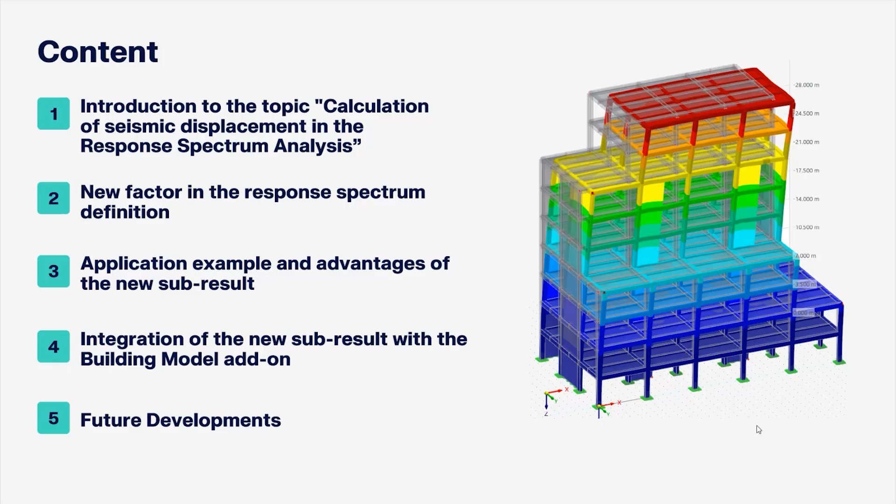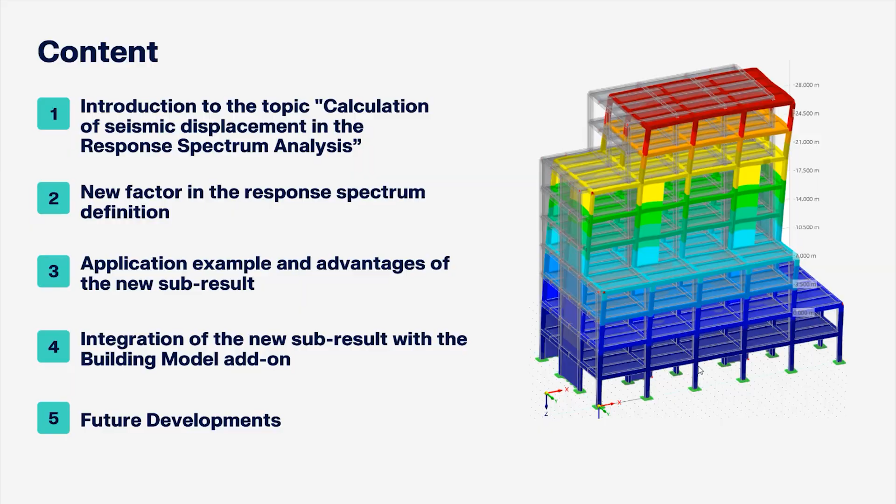The third step, with an application example, we will take a look at the new sub-result and its advantages. Then we will take a look at the integration of the new sub-result with the Building Model add-on, also connected with response spectrum. And finally, we are going to talk about the future developments for the seismic displacement and for this topic in general. So let's start with the introduction, calculation of seismic displacement in the response spectrum analysis.

We are gonna use as the reference number one and the basic reference in this whole presentation the Eurocode 8, Design of structures for earthquake resistance. And as a second reference, we have a previous webinar on this topic with the title Seismic Displacement Limits and Seismic Design of Buildings in RFEM 6. This was last year in November, presented by me also.

We are gonna use the model, so the application example, from this webinar, and also a couple of concepts that I'm gonna repeat in the next slides. But if you want a deeper view on the topic, you can take a look at this webinar. Here's the link in the presentation that you can download after today.

In this webinar we presented an overview of the following topics in general on seismic displacement. We have in the first place the elastic spectrum and the design spectrum concepts inside Eurocode. After this, we can jump into the displacement calculation. Here you see the sections from the Eurocode 8 that define these calculations.

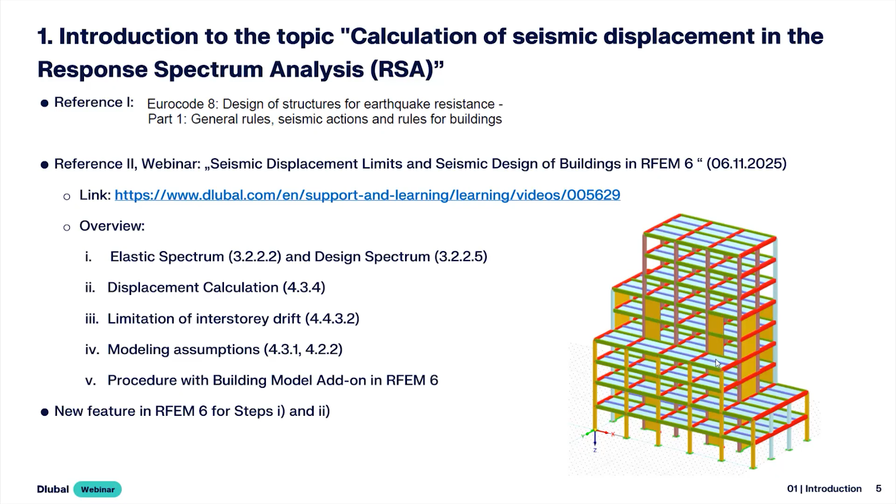Let's jump now to a short review of the elastic spectrum and design spectrum in these sections. For the Eurocode 8, we have these two concepts for the acceleration ordinate curve in the spectrum. We have two possibilities, the elastic spectrum and the design spectrum, with the big difference that the design spectrum contains the letter q, which is called the behavior factor.

It's a description of the characteristics of the structure regarding material and structural configuration, which can also be translated into how it behaves in the inelastic range. And let's take a quick review of elastic and inelastic.

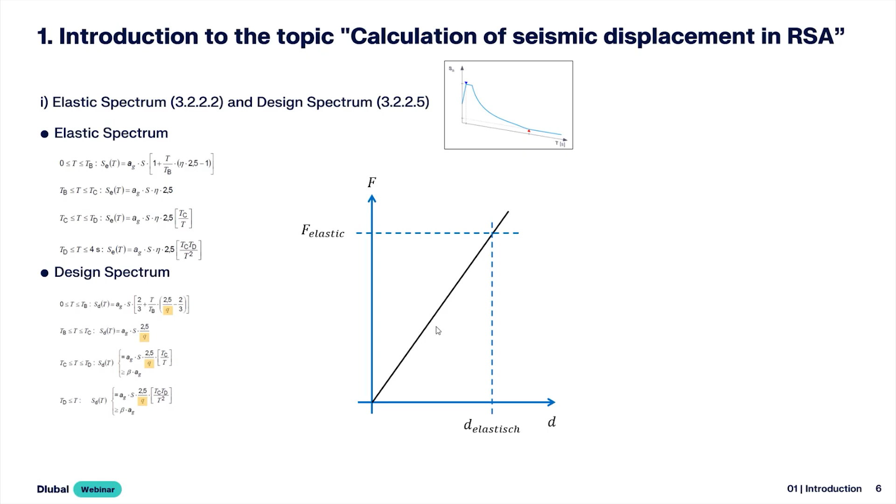The black line represents the elastic response of the structure, that's the assumption of this kind of analysis. RSA is a linear analysis, and we can perform this analysis represented with this line. Now we know that in reality the structure is going to exhibit some degree of inelasticity.

The difference between the forces can be summarized as this behavior factor mathematically, but physically it has the interpretation of a description of the structural configuration and material. So if we say that this is the difference Q between elastic and inelastic on the forces side, maybe base shear or internal forces, then there is the question: where is the inelastic displacement, at which level?

Because we made this division, but the difference in forces with respect to the linear and the nonlinear analysis does not take place in the displacement. So in the displacement, the assumption or the base of the RSA is that linear and real displacement are almost the same. So this blue area is almost the same.

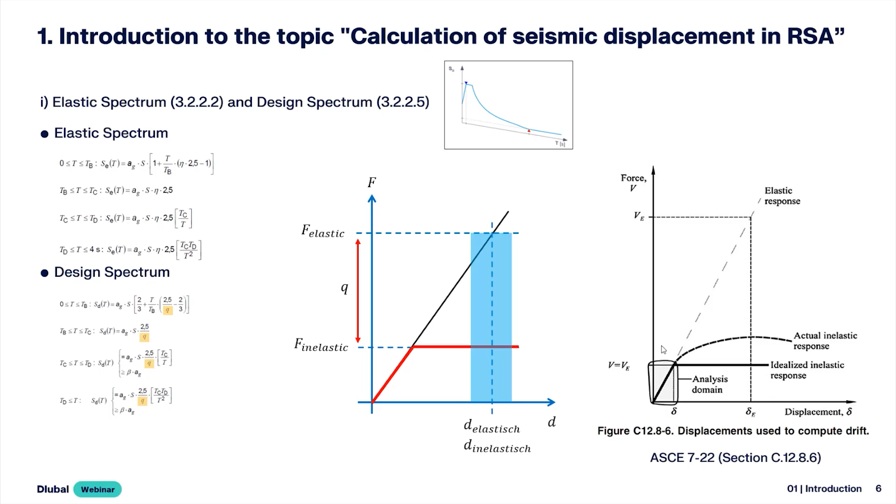Just to remark here that the actual inelastic response of the structure is something between our idealized inelastic response and the elastic response. We are somewhere in the middle, but we have some assumptions in the displacement where we calculate the real displacement and the elastic displacement. Okay, enough with this first topic.

The second topic, the displacement calculation: section 4.3.4 introduces the concept of Q sub D. QD is the displacement behavior factor. It's just a behavior factor plus the word displacement. And in general, it's assumed equal to Q unless otherwise specified.

So this means that we are going to take our displacement calculated according to the design spectrum, here section 3.2.2.5, which corresponds to the design spectrum. So this means the spectrum divided by Q. And then we multiply by QD, which in general is the same value.

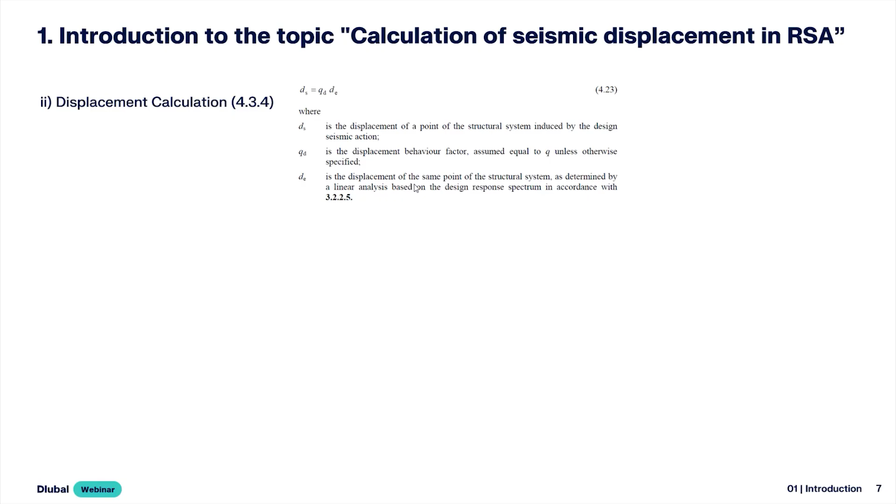So we are calculating back the displacement now. We are taking the reduced spectrum and then we are multiplying again by Q. This approach seems kind of trivial, but we are going to see an example where it is not so simple. Okay.

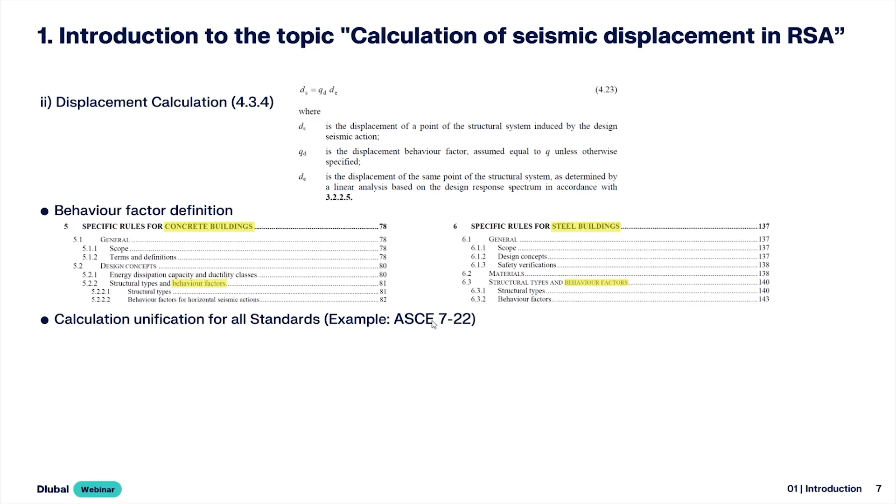And this is an example for Eurocode, just to provide you with the full context on how this development was done here in RFEM. I'm going to show a similar example for the norm from the United States, where we have a table that, as a first filter or first entry on the classification, has the structural type as a big chapter.

So chapter B in this case, in this example, of course, we have A, B, C, D, but the first filter, or better, the first classification, is the structural type, and inside the structural type we have the definitions for the material. So quite another approach, but at the end it provides the same information. But the big difference

is that in this table we have two coefficients, R and CD, which are equivalent to Q and QD. So this response modification coefficient R is the equivalent to Q, and CD from displacement is like the equivalent to Q sub D. So one can write this like Q approximately the same as R, and QD approximately CD. Just from the values on this table, we see that the definition is not as trivial as in Eurocode, where Q is equal to QD.

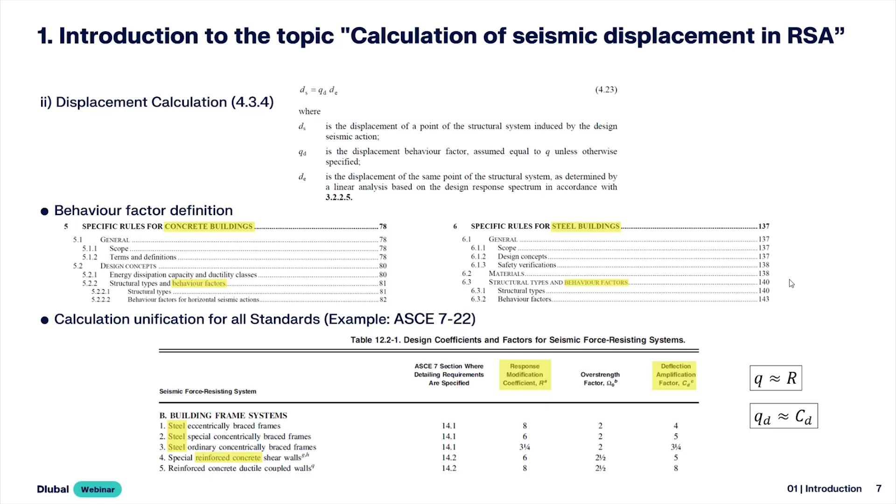Okay, so let's jump now into the second part of today, and it's the new factor in the response spectrum definition. And this new factor is calculation unification for all standard groups. I'm going to show in the program what's exactly meant by standard groups. But the idea is to unify this calculation for all standards in our program.

One can say that the section 4.3.4, so this displacement calculation, is included in every standard. So that's more than the standard. It's a basic assumption from RSA, from response spectrum analysis, and it's present in every norm. Maybe with different nomenclature, but it's a basic definition, intrinsic to the response spectrum analysis.

And the advantage of a linear calculation, as in response spectrum, is that it's possible to make a direct multiplication of the displacement, as we saw in the first graph in today's presentation. Or as in section 4.3.4, we have to multiply to have the real displacement, the seismic displacement. So this multiplication from Eurocode can be generalized as a factor multiplying the displacement, and this factor is dependent on the standard group or the standard that we are using.

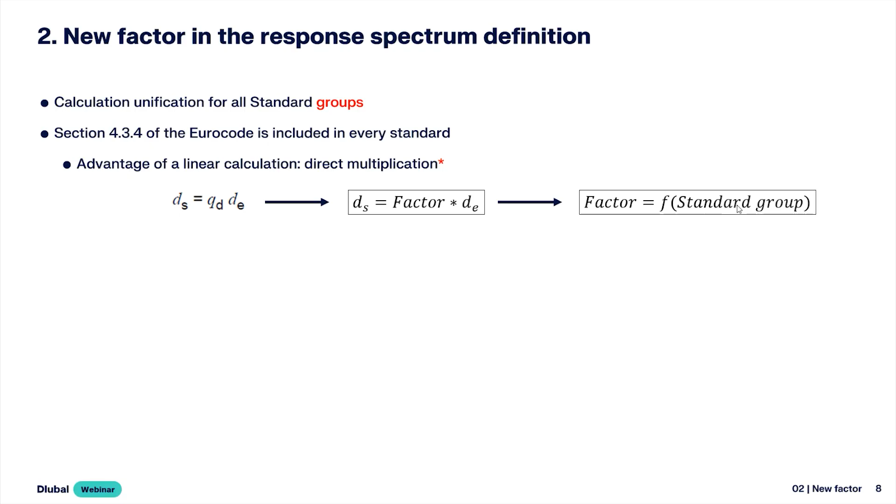Another remark regarding elastic spectrum and design spectrum: in a more general way, one can say that the elastic spectrum is the not reduced version of the spectrum, and the design spectrum is the reduced version. And this is the approach in Eurocode and in the majority of the standards. Here's an example of how it looks in RFEM. In this example, Eurocode is selected, and I can select between two categories. The elastic being the not reduced spectrum and the design spectrum, the reduced version.

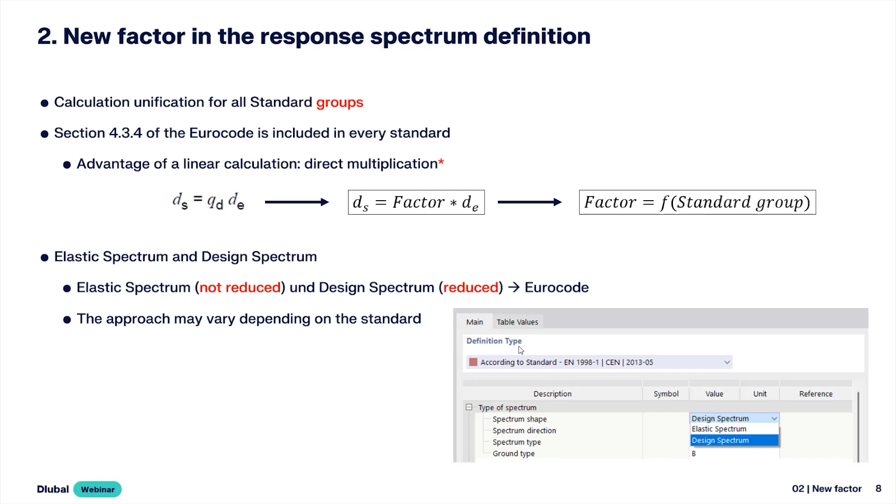The approach might vary depending on the standard, but in general, it's almost always used as described here. Of course, also because of translation in the original language or particularities in each country, the words change sometimes, but the concept remains almost the same. And our approach in RFEM 6 is that the design spectrum is, of course, the reduced spectrum, and the elastic spectrum is the not reduced.

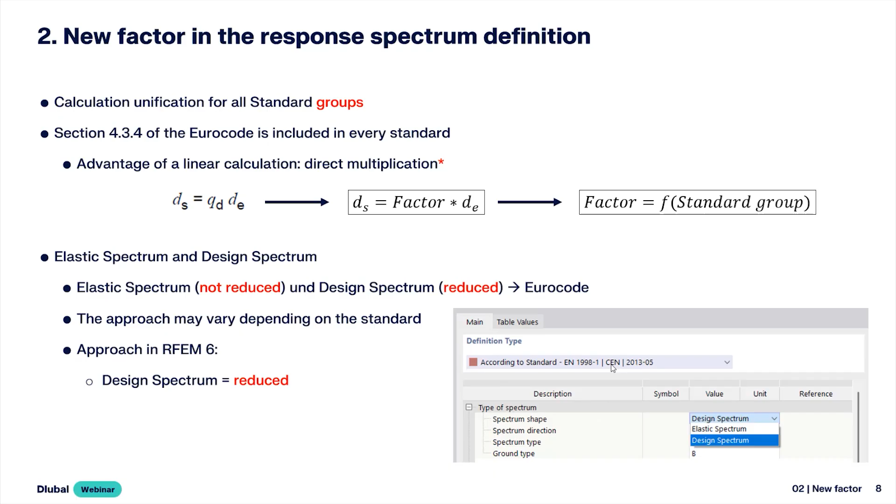Okay, so a long introduction, but quite necessary. The calculation is quite simple. It's a scaling of the results, a multiplication, but the concept behind it is the most important thing, and that's why so much time for this introduction. But now we see an application example of what we have now in RFEM 6.

As I said at the beginning, we are going to use a model from reference 2. You can take a look at this webinar, but for today it's not necessary. We provide you with all the information. We already did the introduction. So let's take a look at this model in RFEM, and then we come back to the conclusion here in the presentation. Okay.

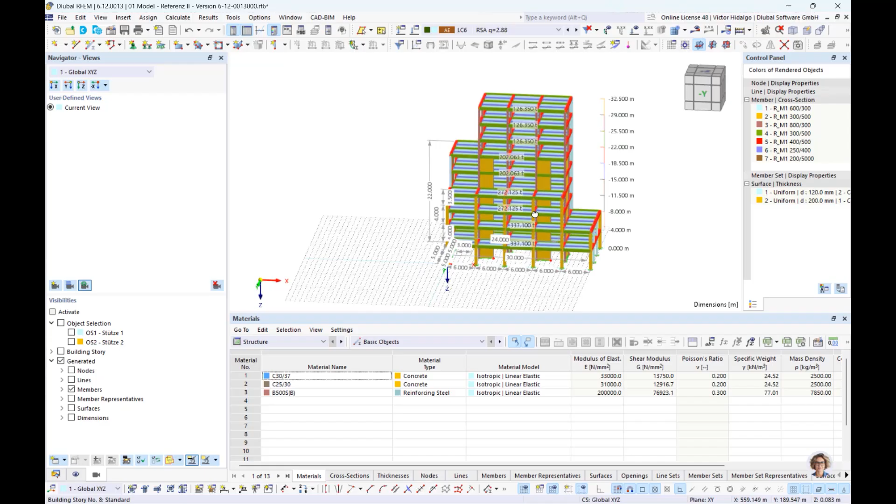So this is our building. It has several floors, and these jumps in height were done to achieve some particular participation factors in the modal analysis, but it's not relevant for today.

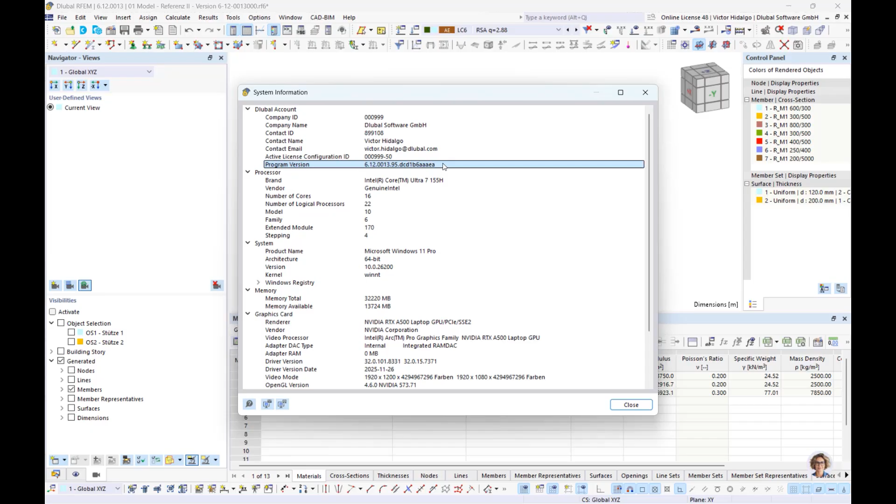Important about this model is that I am presenting here results in the version 6.12.13. I'm gonna show the system information in this, just so that you see what I'm talking about. So this program version is one of the last versions without the automatic calculation of the seismic displacement. So I want to show you how it looked before the new development regarding seismic displacement.

So for this example, in the reference to the other webinar, we had to use two response spectra. One as the reduced spectrum and the other one as the not reduced spectrum. Okay, if I go to the definition of the response spectrum, we are gonna focus on the category factors. So we have the behavior factor, as we saw for the Eurocode basic definition.

And once again, in the webinar in reference 2, I show how to calculate this value if you maybe want to take a look at a first example for it, but maybe you are experienced on the topic. So as an engineer, we make the definition of Q. We provide Q, and I'm gonna change the value just here as a reference. If it's 2, the ordinates are gonna be bigger. If it's 2.88, the previous value, that's gonna be the definition.

And here, what we mentioned about elastic and design. So if I change to elastic in the category factors, I do not have this behavior factor anymore. So this elastic spectrum is equivalent to the design spectrum, but with a Q of 1. Okay. So we have this 2.88. I'm gonna leave the definition as before, and just keep in mind that in factors we only have these two for Eurocode. Okay.

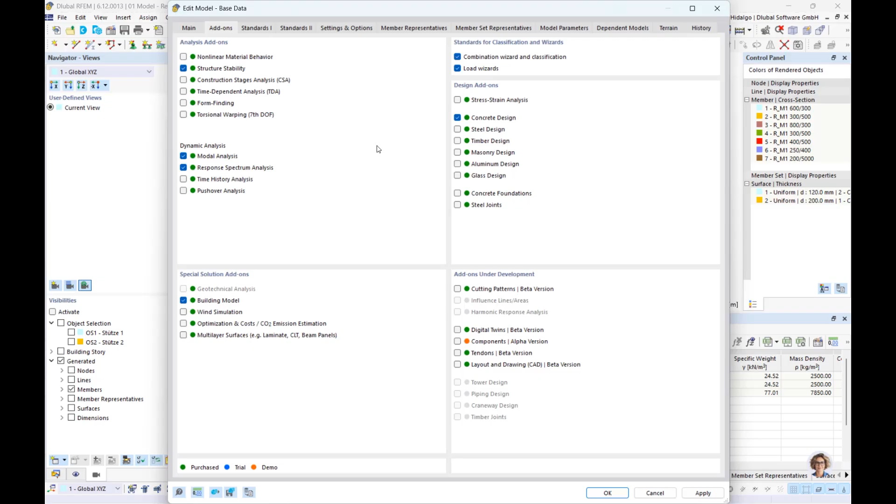And this other definition of the response spectrum, for Q 1.0. Okay, so here one additional thing: in the base data, in the Standards I tab, according to the activation of the add-ons, I have to select a design standard group, and the definition of the standard group is the first group here. In this case, for dynamic analysis, we can select one among all these possibilities, where each norm has its particular definition of the spectrum.

So I'm gonna change, just as an example, to the example that we are using in the presentation as a comparison, ASCE 7. I'm gonna change this norm. Now the definition here is according to standard, so I selected standard, and now I have another set of options where we have a different approach according to the norm. And so we see here other categories, other values. So quite different according to each norm, and that's why the different standards and their approaches were so important in this development.

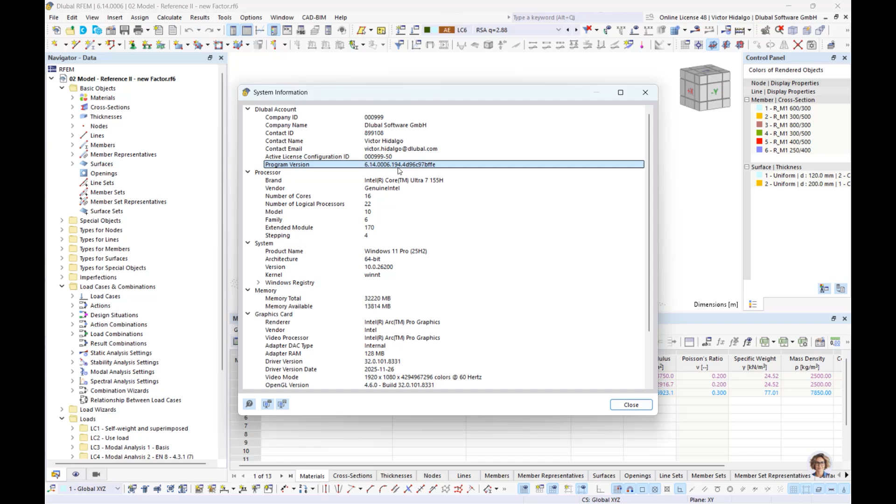Okay, we took a look at a version without this development, and now we are gonna jump to a newer version where we are gonna take a look at how it looks now. So I'm gonna go to the base data and show that for this example we keep the Eurocode, and the help system information. This is one of the first versions with this new calculation, the 6.14.6. So another version, and if we take a look at the response spectrum definition, we see the new factor that we already discussed in the presentation.

So I'm gonna go inside the definition, and here let's take a look at the factors. We have a new entry, the displacement behavior factor, where we have a drop-down list, and I select how I want to define this. So the first option is that the displacement behavior factor is equal to the behavior factor, which is provided in the norm.

However, this section also mentions that each country can redefine it according to the national annex. And that's why we introduced this user-defined option. When I use the user-defined option, I'm able to provide a different value.

Okay. So it might be the case where we have to consider this in a different way. And this 2.88. Okay. So I'm gonna go here with the behavior factor Q, so the automatic definition, and that would be like the difference regarding the Eurocode.

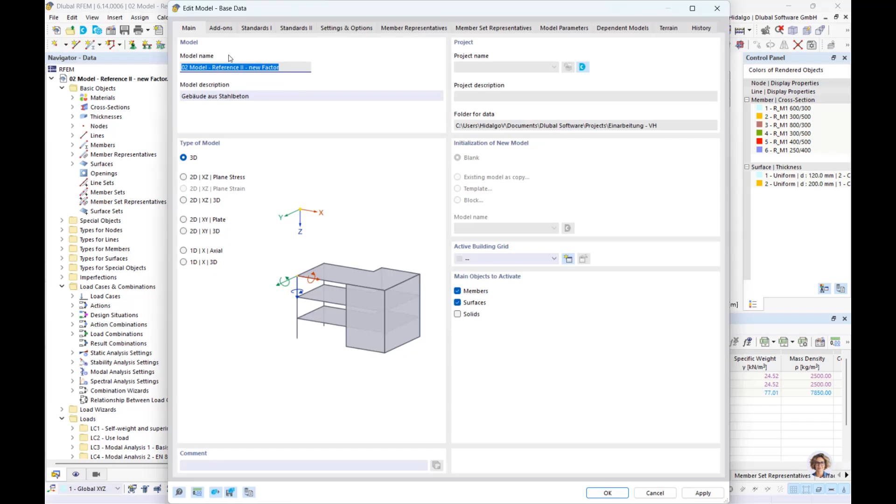So as we introduce other examples like the United States norm, let's show here what the new version of this standard is. Okay, so in this case I'm gonna go directly into the definition again. And here, this is the equivalent to the design spectrum, kind of. It's not exactly, because you have here the spectrum type as a second category. But when I select this one, the other one is gone. So this is a particularity.

This is the definition of the norm. Maybe not that important for today, just to take a look at the factors. And when I go to the category factors, now I see that I have the two factors, R and CD. According to this norm, the definition is not open anymore. So we don't provide for ASCE7 the option of a user-defined value, because the definition is universal, it's constant.

So the importance factor appears with the CD value. In this case, it's already defined, and there's the section that defines it in the corresponding standard. So that's how it would be for this norm. I'm gonna show you just one more example, just to see how diverse or how different this can be.

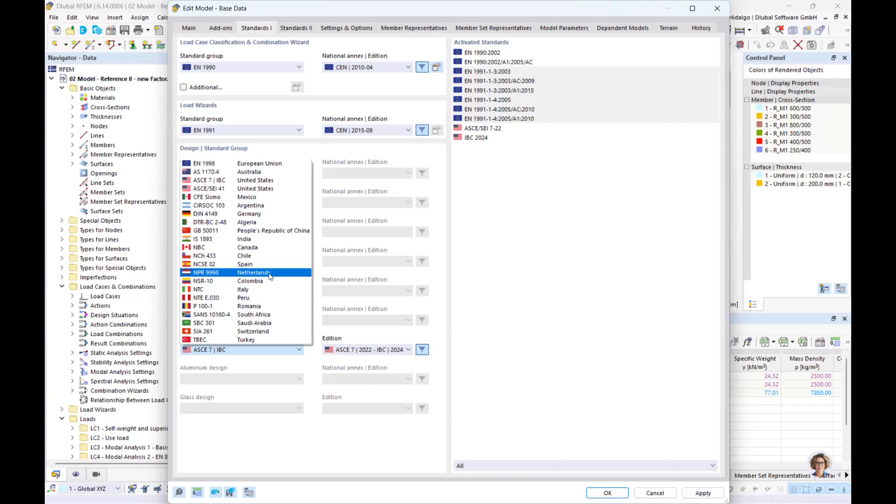So let's take now Canada, the 2020 version, can be also the other one. Now we take a look here at the modification factors. Here we have, in this case, the same definition as in Eurocode, just by coincidence. But here in the factors, we have now something in between. We have RD and R0, R sub-zero, which are not exactly correlated 100% to the R factor from ASCE7. So it's quite a different concept, used as an example, as a reference.

And here we have a mixed approach where there is indeed the option user-defined, because the norm specifies also that according to the criterion of the engineer, this could be adjusted, or there are some other factors that could be manually adjusted. So when I use user-defined, the factor is gonna be editable. If I come back to according to 4.1.8.13, here I have the basic definition of it. If I change the value, this is gonna be automatically updated.

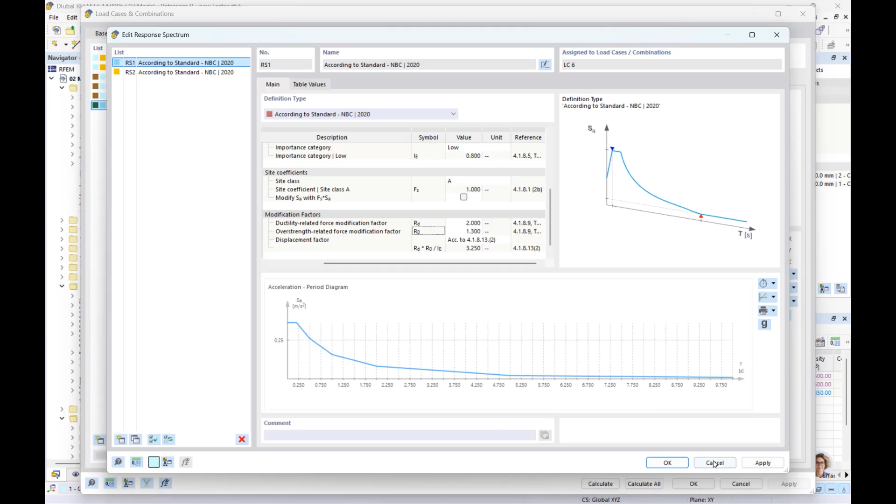Okay, so with three examples, we see that by itself it remains a simple multiplication, where we have the concept of displacement factor or displacement behavior factor, but the definition before is really dependent on the norm. It can be as diverse as one or two or three parameters. So there is not a general rule, and each standard makes its own definition. So you have to take a look at the norm if you are switching between norms.

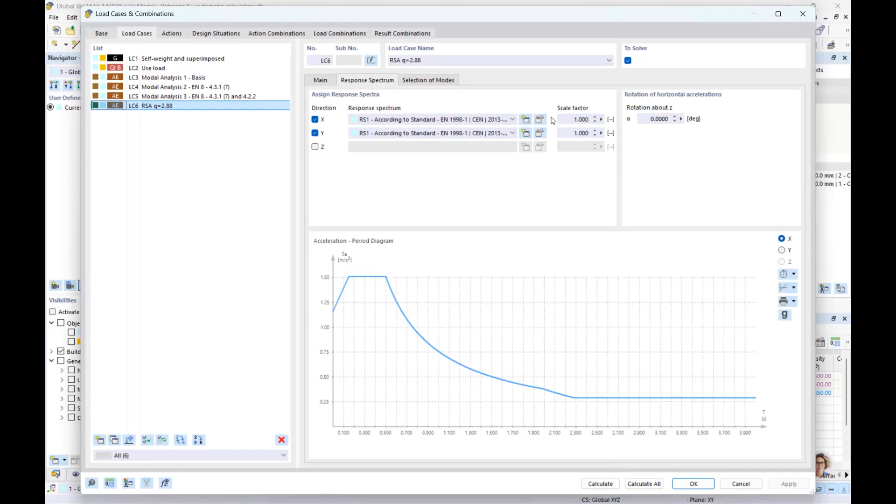Okay. So the next step would be to run this model. I already did to save some time. So this is the same model, just with results for this response spectrum analysis. I already have the results for this only load case; from all the load cases, I made a run just for it. Just for the sake of completion, I'm gonna show here the definition, all what we saw here. Exactly. Now the results for this part. So maybe we take a look at global deformations, etc.

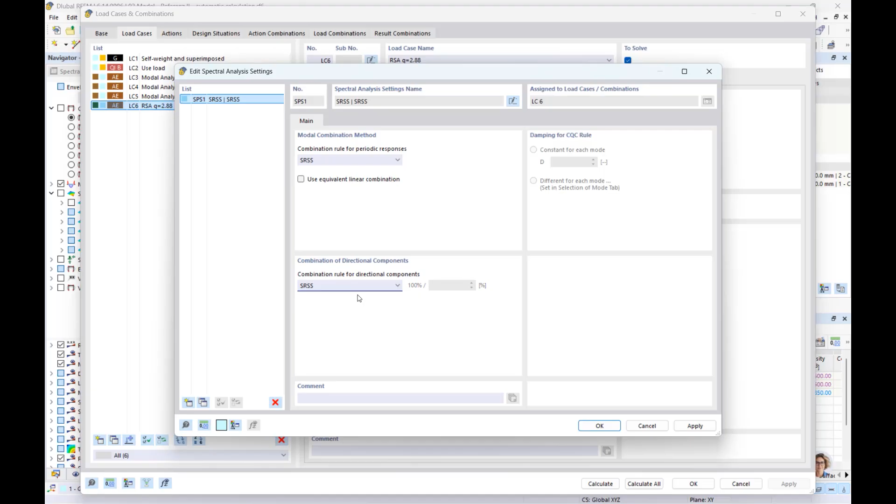Where do I find this new set of sub-results? When we show results for a response spectrum analysis, here on the navigator, we have a selection according to the desired sub-result. These rules come from the selected directional combination rule. I'm gonna show it just to have a full review on this topic. So this is the combination of directional component rule that was selected. If I use scaled sum, the name here is gonna change. I'm gonna leave the SRSS; I don't want to run the results again.

And also we see the results per direction: X, Y direction, and the selected SRSS. And as you already noticed, there is a new entry, which is the combination of components of direction with the name displacement. This is where our new factor is gonna be taken into account, and we are gonna multiply for the displacement result the base values with respect to the reduced version. So that's why the whole introduction to the topic. And now we see these results here in the program.

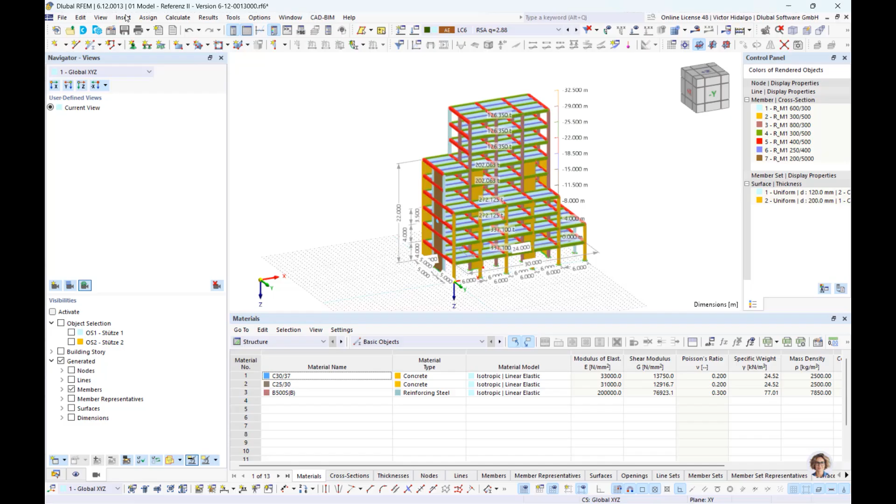Just as a comparison, I'm gonna go back to the previous version, 6.12, and show that in the results for this load case, for the RSA, there is no displacement entry, so we see the difference here. Let's take it once again, okay.

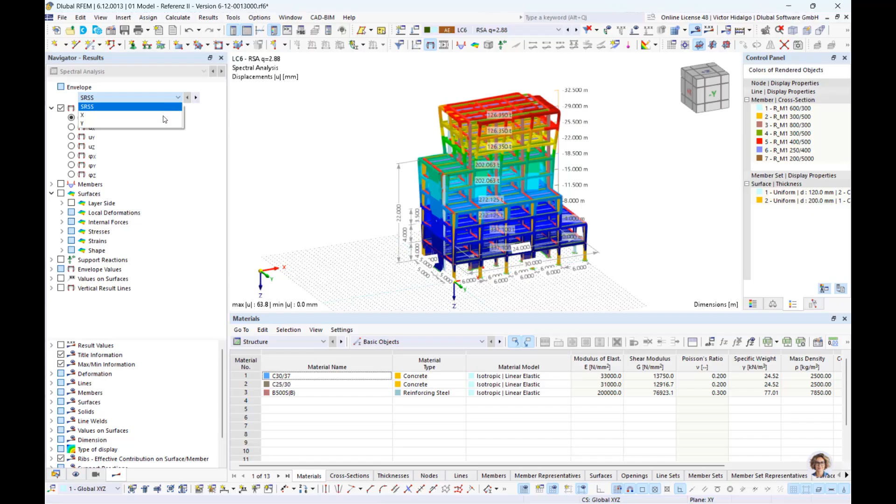If I minimize this, now I do see a displacement result. And that's the difference, or that's the new development. So let's go back to the presentation. And with this model, we are gonna make here a summary of what we achieve with this new sub-result. Sub-result refers to the selection in the response spectrum.

Okay, so the base size of the file is 3.6 megabytes. We did a version without the automatic calculation, so we need 2 RSA. That means that in the results we are gonna have more data. And in the version with the automatic calculation, we have instead just one response spectrum analysis, but with one additional entry. So overall, of course, we are gonna have a smaller file size, but not exactly the half. Okay.

So for the first, with 2 RSA, we have a file size of 180 megabytes, and then we come down to 140. When we talk about megabytes, it's not that relevant for nowadays capabilities of computers, but of course, if we add to this the design of the material and a real example, we can really save space, and also the switching between results in the interface.

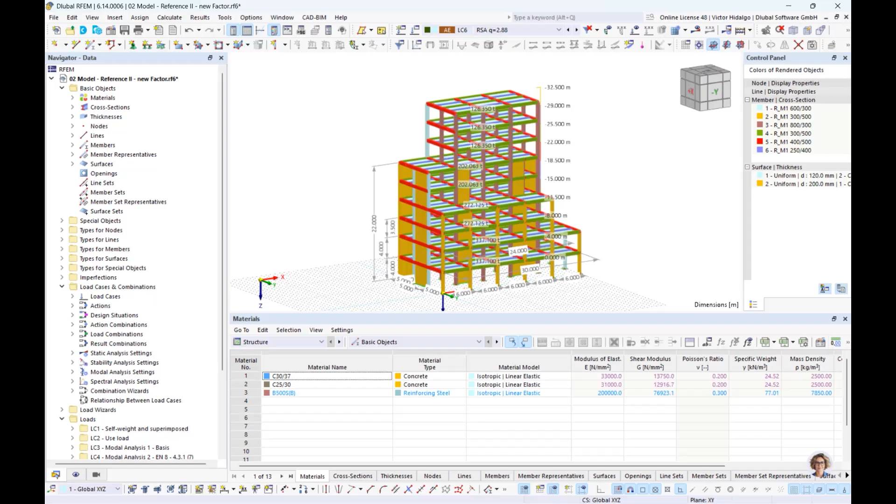So what you can do here, for example, by showing the results, let me show exactly here the selection or jumping between load cases. This is gonna be always faster if the size of the file is smaller. Okay, if the file is smaller, my computer is gonna work just better.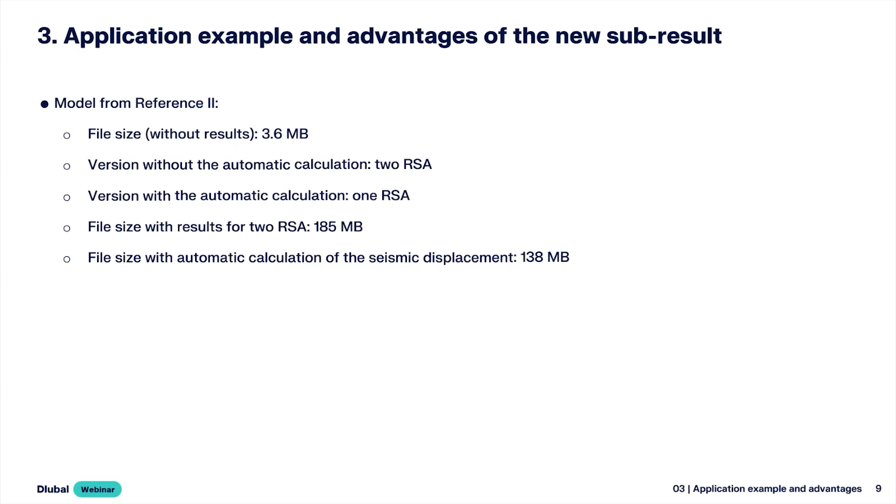So advantages of this new sub-result. The displacement sub-result gives, as we saw, smaller files, a faster interface in the program. Also a unique load case definition, so that's also quite important. And it's automatic, it's not activable, so we made the decision to not make it optional because it's a requirement that takes place in every standard. So it's quite important that we as a software provide our customers with the best guidance possible.

So that means that we report this result, and we expect that you as a user wonder, ask, what's this result, look into it and decide if it's important or relevant for your analysis and design. Okay.

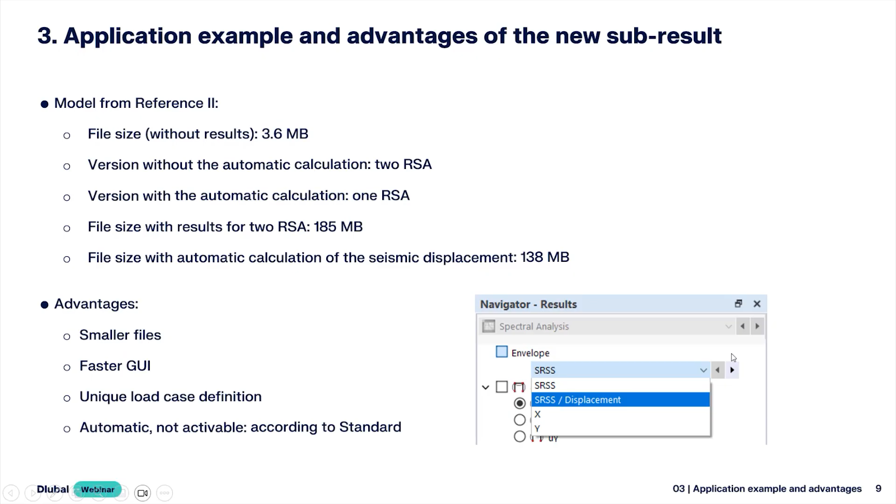Okay, with that, we are done with the biggest part of the result, and now we jump into the last part of today's webinar, which is the integration of the new sub-result with the building model add-on. So the building model add-on and the spectral analysis, or the RSA, when both of them are activated in the program, deliver a particular set of results, which are the results by stories. I'm gonna show this in the program, but let's take a look here at the concept.

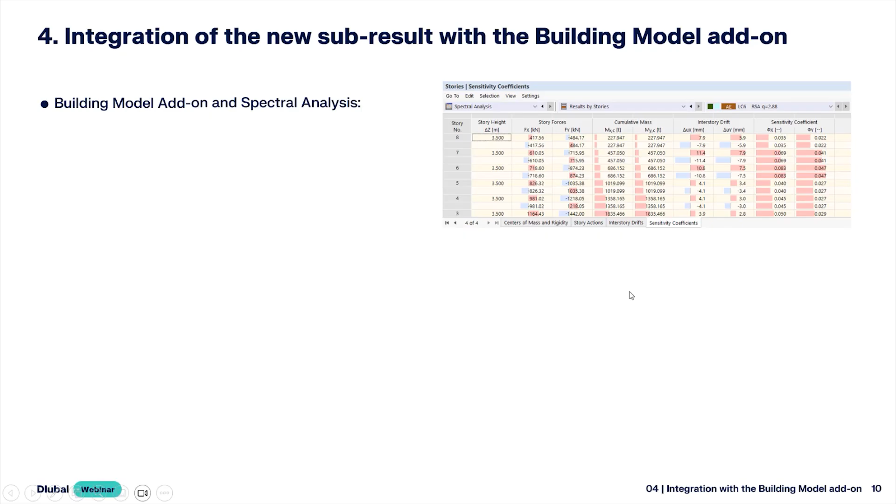So we have this table, and this entry, results by stories, has four other tables, or tabs. These tabs regarding the seismic displacement, the interstory drifts and sensitivity coefficients are gonna be affected by the selected sub-result. So at the end, we show this table for a particular sub-result, and we are gonna take a look at this in the program. But let's review what these two tables do.

So the interstory drift. Here's the section for the Eurocode. This is a unique definition, and as we saw, it's just the reduced displacement times the factor. There's not that much to decide. This is a unique definition for all standards. But there is a particularity in the sensitivity coefficients table. According to the standard, we might have to switch between sub-results in the spectral analysis.

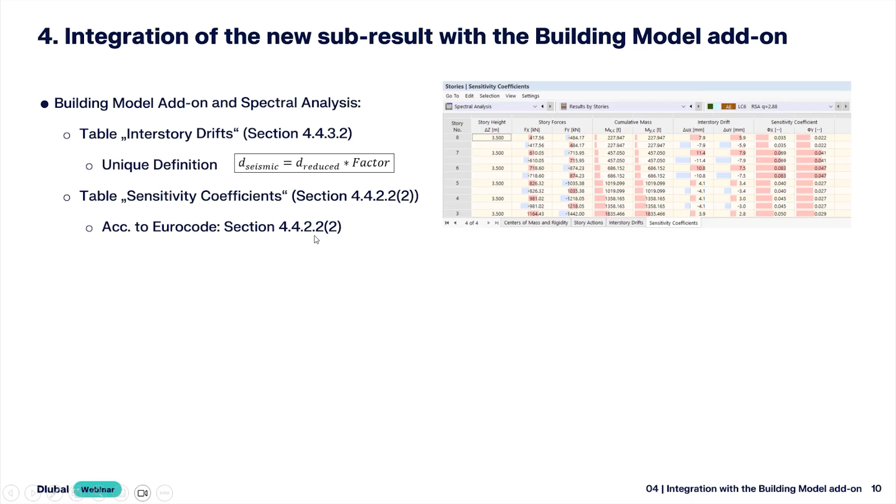And here an example. According to Eurocode, section 4.4.2.2, subclause 2, how to evaluate the so-called sensitivity coefficients is shown here. The vertical load is taken into account. And the most important parameter here is dr, where dr is in accordance with section 4.3.4, which is the seismic displacement calculation.

So Eurocode says to us, you have to use this seismic displacement level to calculate the sensitivity coefficient, so we can summarize this as the sensitivity coefficient as a function of the seismic displacement.

Now, once again, with our comparison standard for today, we are going to take a quick review of ASCE 7, section 12.8.7. So let's take a look now at how the sensitivity coefficient is defined.

Just as a summary, I'm gonna show here just a graphical reference. In this case, this standard defines the sensitivity coefficient based on reduced displacement. So it's quite a particular approach, but well, it's what the standard defines, and we have to follow it.

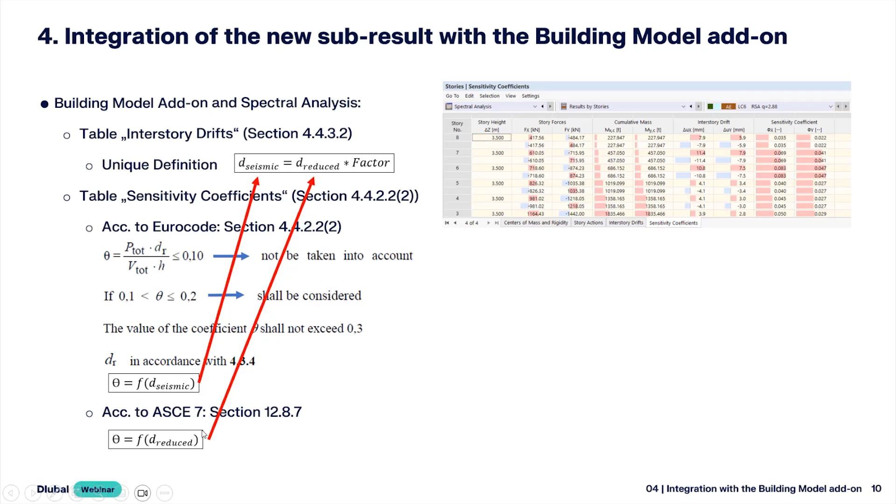So here we are on two levels for the same norm, related to our new sub-result and our seismic displacement concept. For Eurocode, we should use one particular sub-result, and for ASCE, we should use another sub-result.

Just as an extended review on this, which is just an image from this standard, take a look at this corner. Zoom in: the subindex E defines elastic. So they're reduced, and without subindex we have the real displacement. And we see in the definition this theta, the same formulation as the Eurocode, but this delta, the drift, is referred to the E result, so to the elastic, the reduced value.

That's also confusing. This norm uses elastic, which is not completely elastic as in Eurocode, but I just wanted to show as a reference what's behind this concept. At the end it's a simple multiplication, but behind that there is a full concept, a full definition, and if you have to use another norm, combine or compare them, be careful what the definition of each concept inside the norm is.

Okay, so as promised, I'm gonna switch to our model with the seismic displacement. I'm gonna switch to this sub-result and show this table that's only active when we have the Building Model add-on. So I'm going in the table to the spectral analysis, and I select this entry results by stories, and for that I have to run the analysis with the Building Model add-on. If I select results by stories, we get what I had in the presentation, which is inter-story drift and sensitivity coefficient.

For inter-story drift, just as an example, if I show this with the sub-result SRSS, this would not be the real result. These are smaller, reduced displacements, and the sub-result displacement would be the true result for this table. But this is quite the same for all standards.

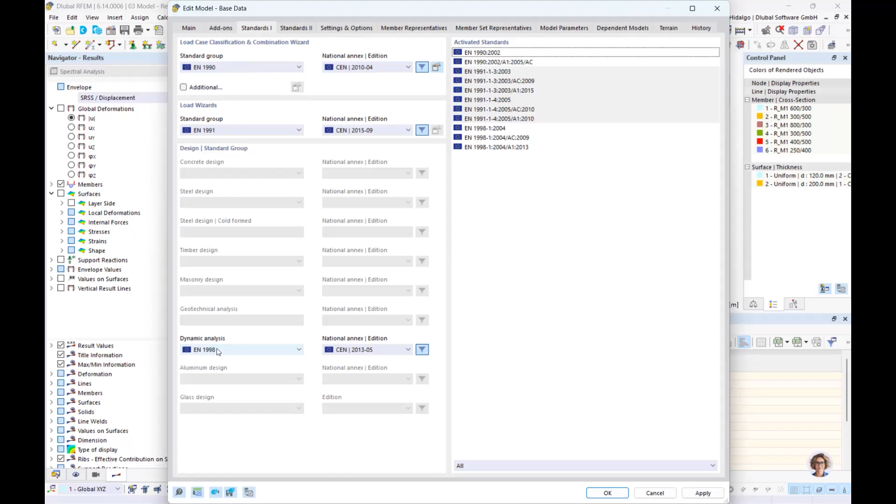But going to the sensitivity coefficients, if I'm using the Eurocode as a standard in dynamic analysis, then I can use these values directly. But if I'm working with ASCE 7, then for evaluating the sensitivity coefficient, I should change to the not scaled displacement. So I should use this in this case. Of course, just as a reference.

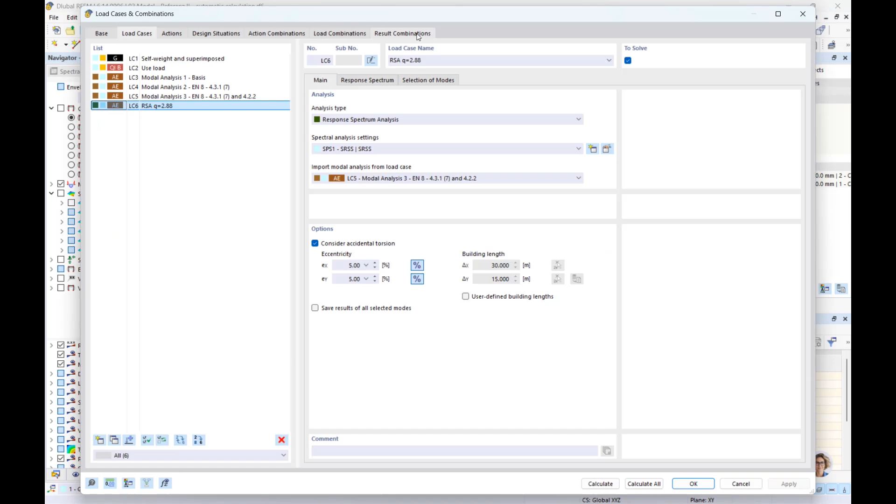In this case we are partially there because this is the result used for the spectral analysis. If I would like to use this in a result combination as a final result, I have to consider the vertical load cases. So I would go to a result combination and create an appropriate one. I don't have it here on purpose, just to show you how to define it quickly. Maybe you already know, but just as a reference.

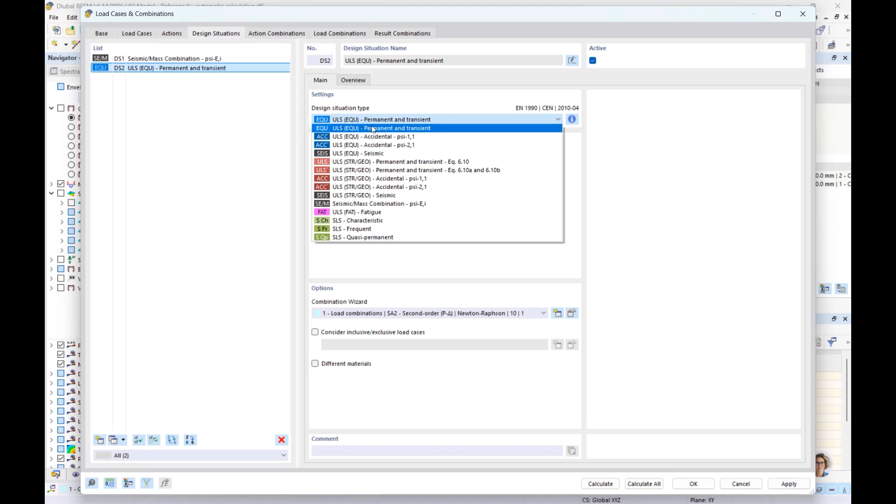So I can go to a design situation, create a new design situation of type seismic, where it's important that in the options the combination wizard is set as result combination, otherwise I cannot consider my response spectrum analysis. And in result combination, after jumping into the tab, we already get the corresponding result combination according to the selected norm.

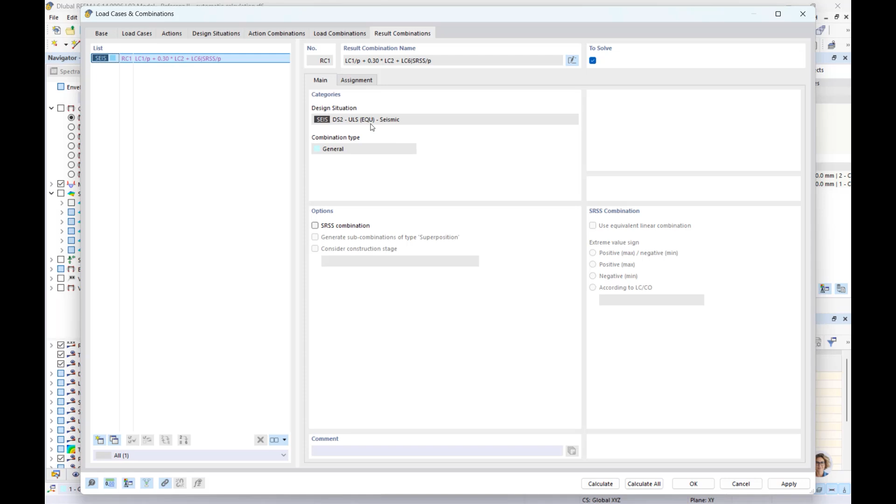In assignment, we are gonna see the sub-result. This sub-result must be activated here. So take a look in options in the base load cases and combinations. You have to activate the sub-results option, and that's why I can see this column.

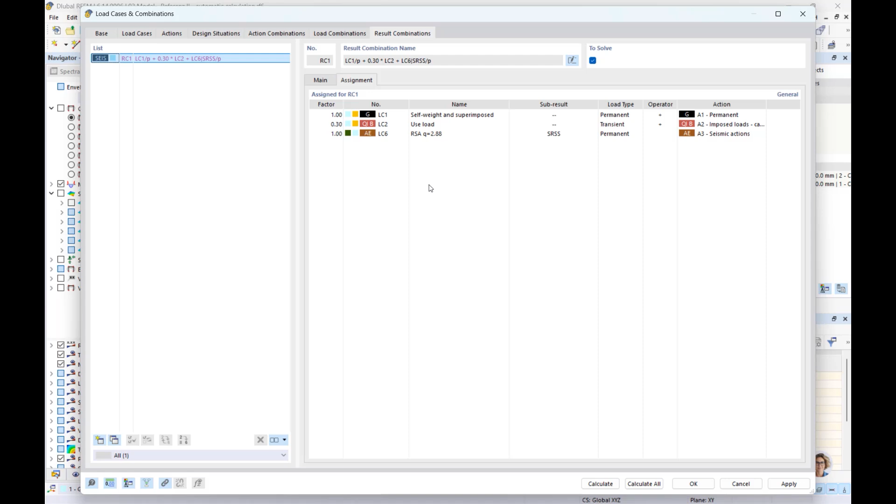In this case, if I want to use these results for, for example, concrete design, I can use this directly. But if I want to take a look at the displacement, I can copy this, but then I have to use the sub-result displacement.

And that's an advantage of this new development. So with the same load case, which I have only one now, one response spectrum, and with result combinations, I can create what I want to use either for design, like without multiplying, or the results in the displacement. Of course, Eurocode is directly in the multiplication q_d, but we saw an example from ASCE 7 where the multiplication factor is not exactly the same as the division factor of the spectrum. So that's why each standard has a different approach.

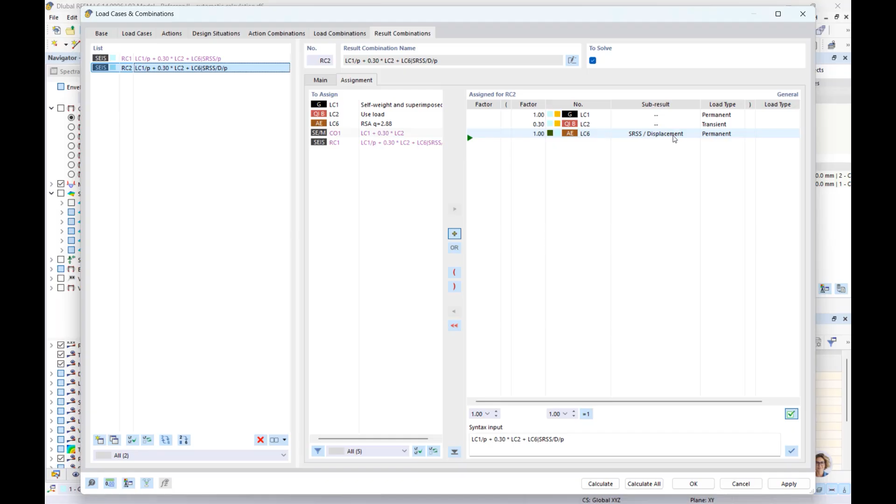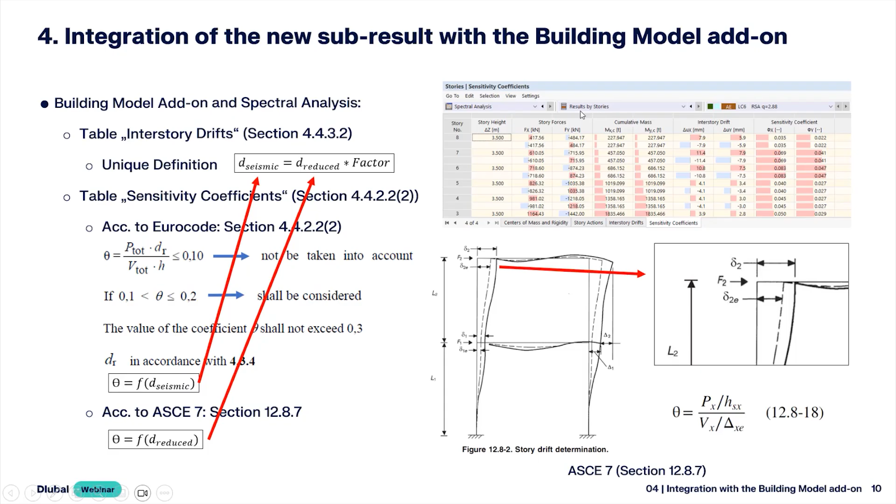Okay, I think that's all on the side of content and this new development. So let's go back to the presentation just for a final word on the future developments on this topic, seismic displacement. As I just did in the program, I create a result combination for the seismic displacement, and each standard defines how the vertical load should be combined with the seismic displacement. So we need here an appropriate serviceability design situation for the seismic case. We still do not have this, and this would be the first step on this topic of future development, to create the appropriate design situation. And the idea is that the program selects automatically the corresponding sub-result.

On the second part, this was not treated today as itself, but you can take a look at this in our reference, the other webinar from last year. It's the inter-story drift limit. So we want to have in the program the possibility to compare limits directly inside the program, according to the norm. These drift limits are specified in each standard, okay?